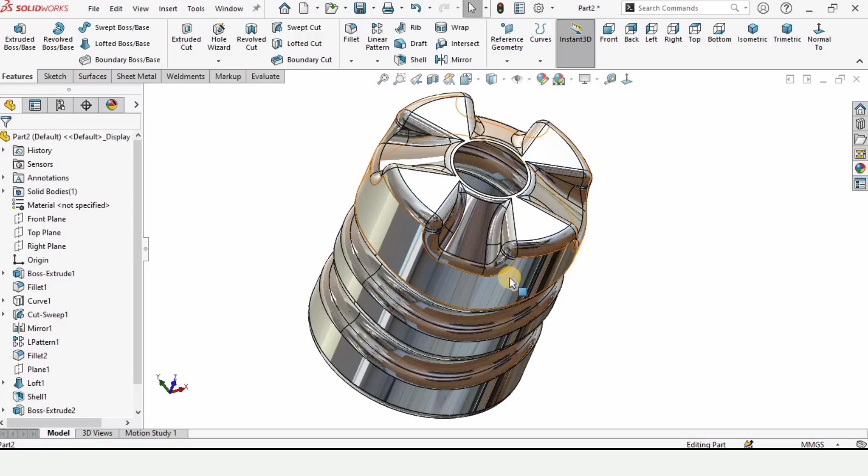In this tutorial we will be designing this water tank in SolidWorks. So let's begin. Click on part and then click OK as we are working in the part file. From here you can change the background to plain white. Then click on front plane and click on sketch.

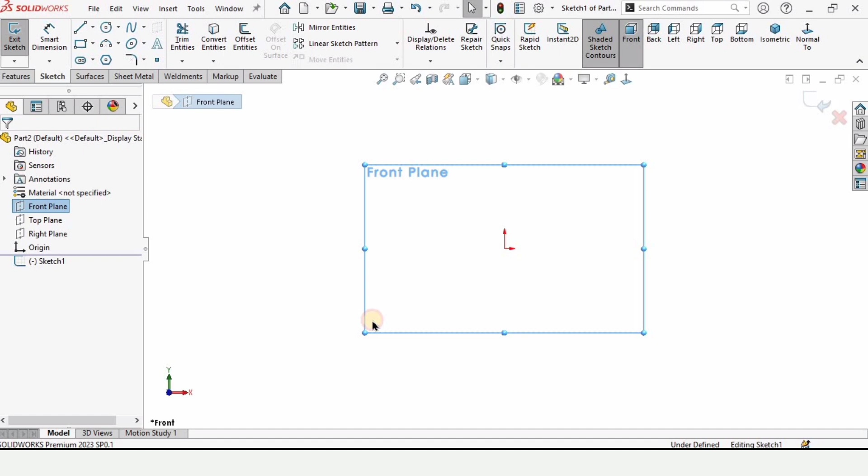Before proceeding, make sure that you are working in correct units. I am working in millimeters, that is MMGS. Now select this circle and make a circle at this origin. Now let's specify the diameter for this circle, which is 375 millimeters. Then go to features, select extruded boss base, and here specify the length of extrusion, which is 375 as well.

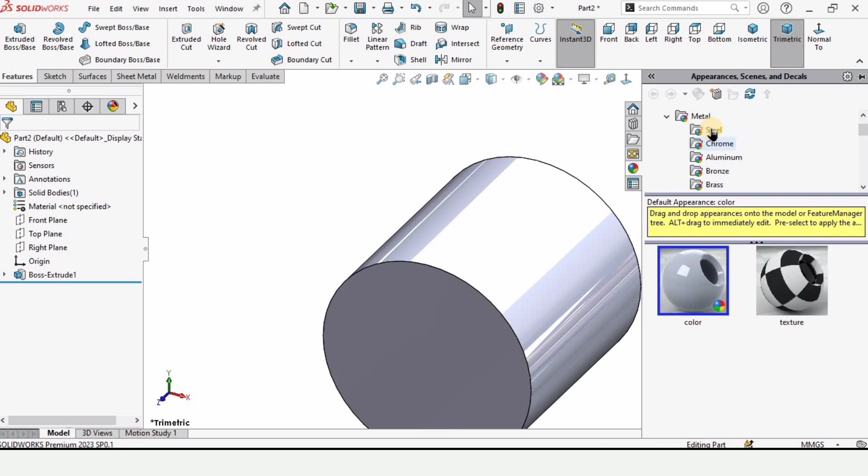Now click OK. Before proceeding any further, let's apply some appearance for better visualization. By the way, this is an optional step. After specifying some appearance, now let's select fillet and apply fillet on this edge, and here specify the radius as 20 millimeter and click OK.

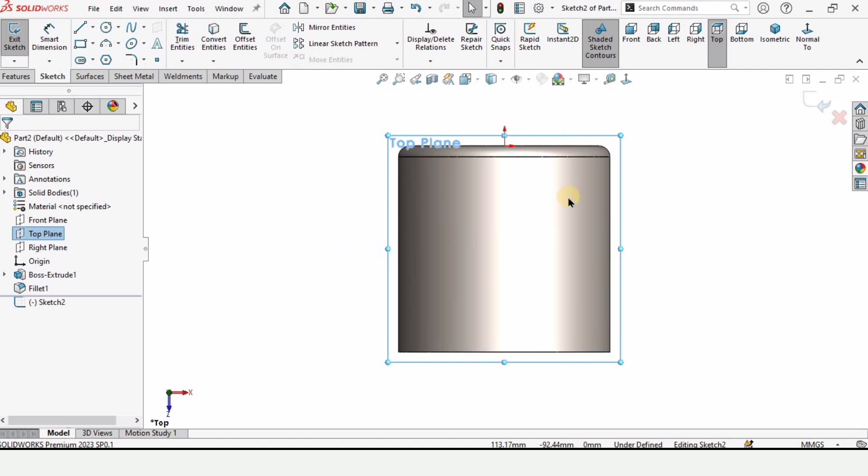And now select this top plane, which basically cuts this part in half, and here select sketch. Now from here select spline tool and here make a spline like this. This is an approximated sketch. You can specify the dimensions, but I'm not going to. You can very carefully see it and make it like this.

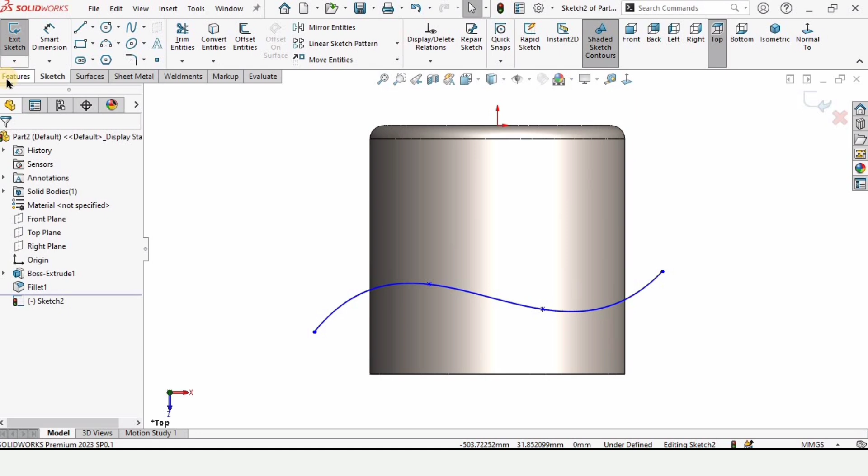Now go to features and here first exit the sketch, go to curves and select projected curve. In this window we need to select this sketch, which is basically the spline, and then select this face or surface and click OK. The projected curve on the surface will appear.

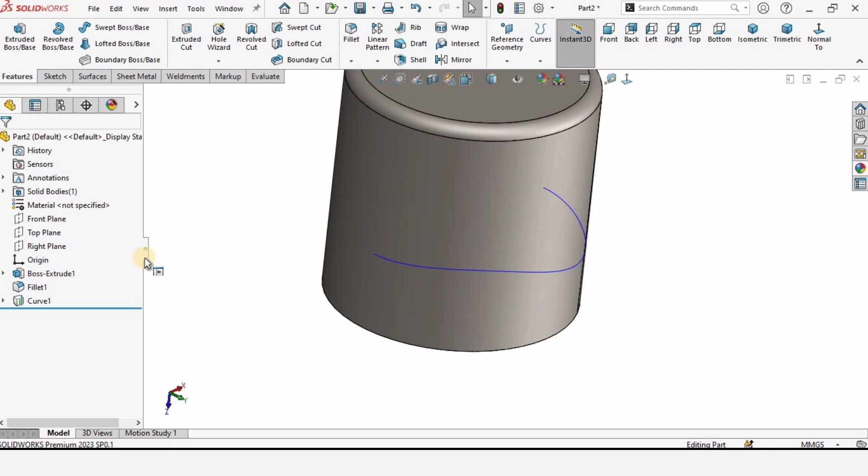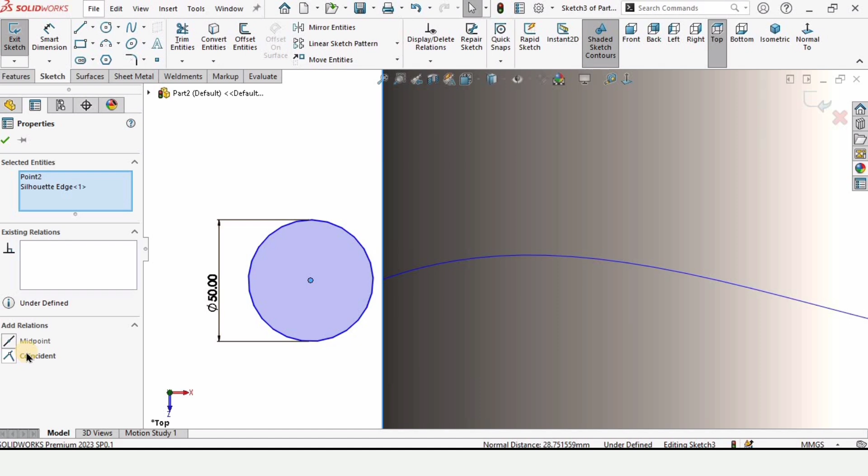Now select the top plane again and click on sketch and make a circle like this, and specify its diameter, which is 50 millimeter. Now press escape, hold the control key on your keyboard and select this line and the center of the circle and make relation coincident.

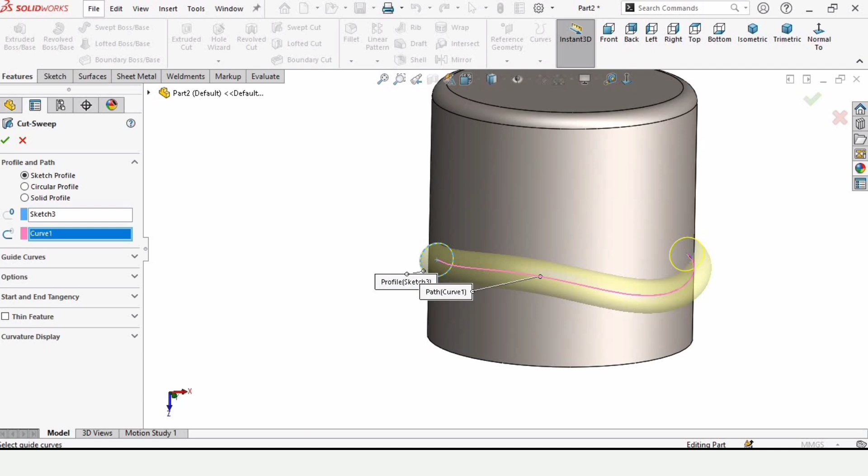Now exit the sketch and go to features and select swept cut command, this one. In this window we need to select this circle, and in the next window we need to select this spline, and it will cut like this. You can check the box from here, and we need to mirror this thing. Before that, let me hide this spline.

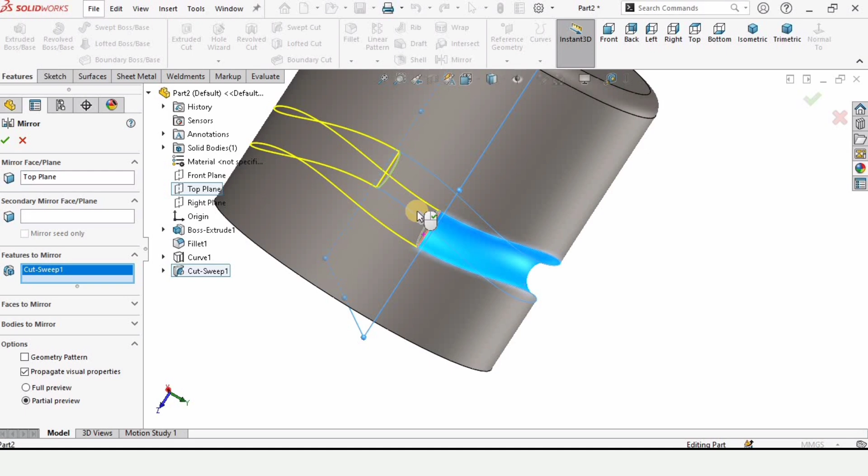Now select mirror. In this window we need to select the top plane, which basically cuts this part in half, and in the features to mirror window we need to select this cut that we have just created, and as you can see this yellow cut will appear. So that's how we can mirror the same cut.

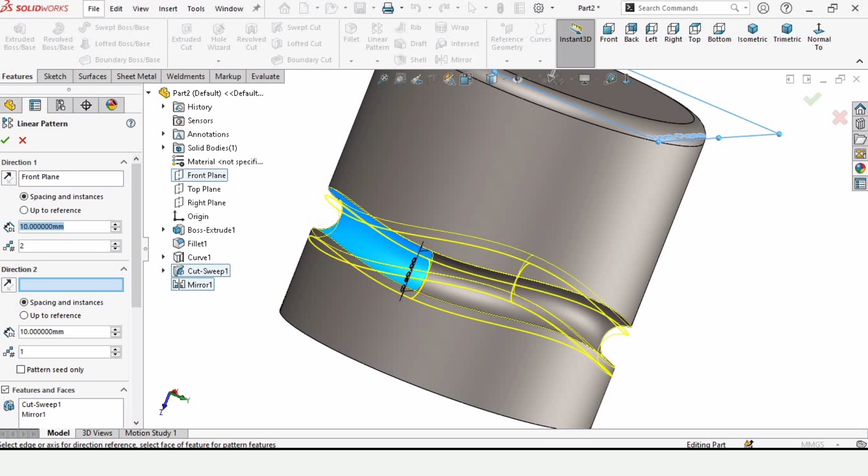As we want this same cut on the upper side, I am selecting linear pattern. In features and faces I am selecting these two cuts, and in direction just specify the front plane. Now we need to specify the distance, so I'm specifying 120 millimeter. This can be adjusted. Since I want it upward, I'm selecting the upward direction and check this box. This cut is now linear patterned, and now we have two cuts.

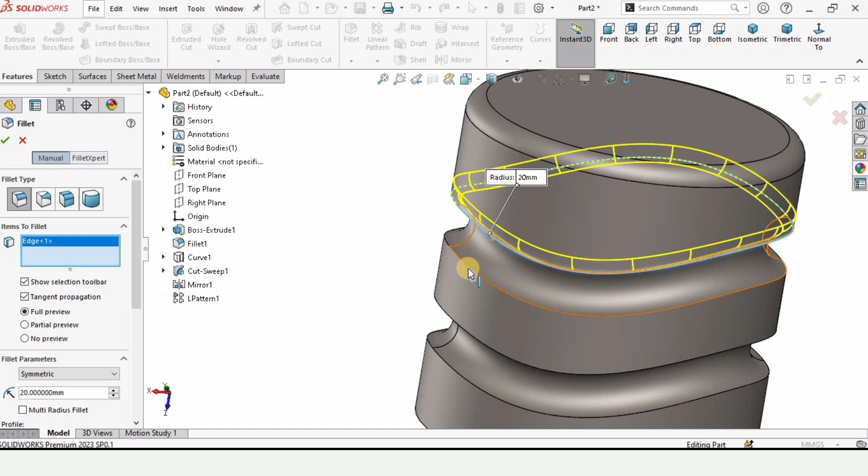Before moving any further, let's create some fillets. These are basically 4 edges, and apply a 20 mm fillet. Second edge, this one is third, and the last one. 20 mm fillet is fine for these, and after that check this box. Fillet has been applied, as you can see.

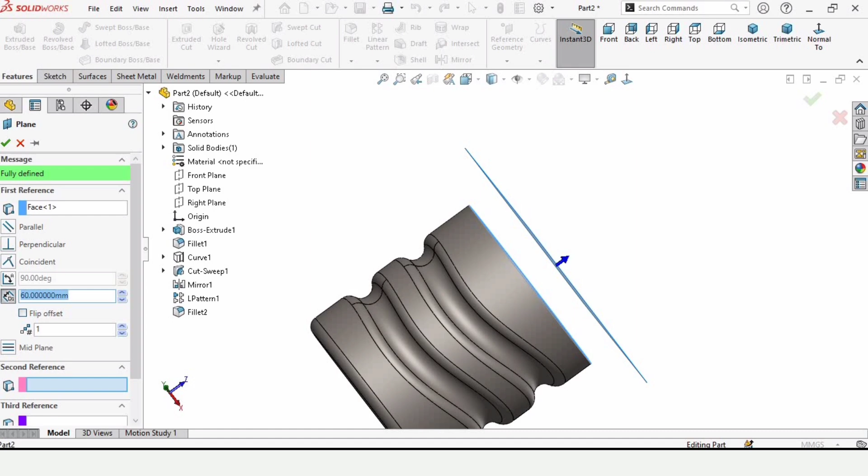Now select this face and in reference geometry click on plane. We need to create a plane which is 60 millimeter offset from this top surface, and check this box. Now select this plane and click on sketch. Here we will create a circle, so select circle and create a circle at this origin like this.

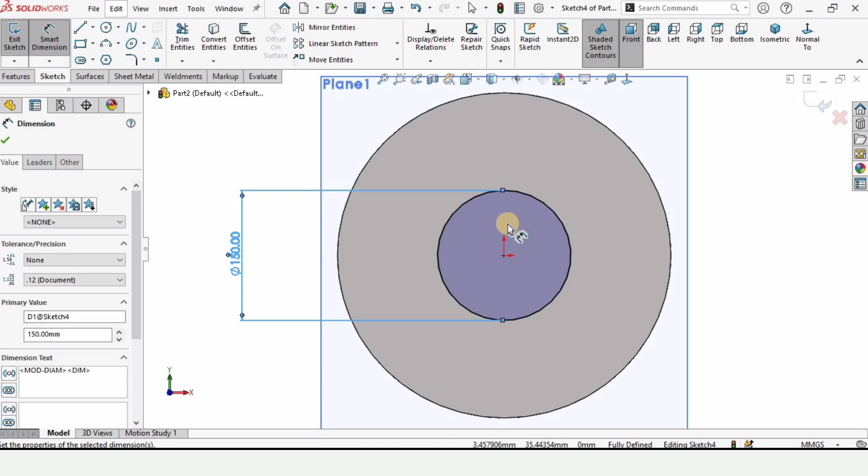Now here specify the diameter for this circle, which is 150 millimeter. Simply exit the sketch from here and go to features, and here select lofted boss base. In this profile window we need to select this edge, circular edge, this is appeared here, and this circle that we have just created. So basically we wanted to create this profile by using the lofted boss base.

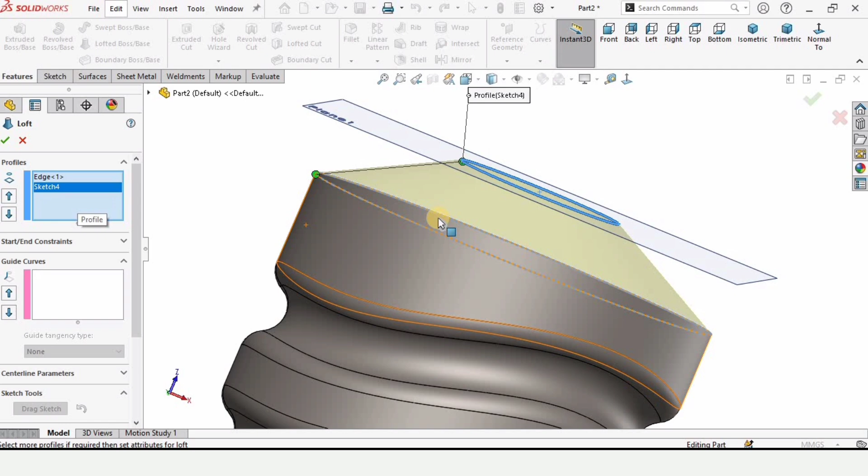As we have nothing to do with this plane anymore, hide it from here. Now we will shell it, so select shell and here select this face and here specify 5 millimeter. 5 millimeter will be the thickness for this water tank, and here you can see now it has become hollow.

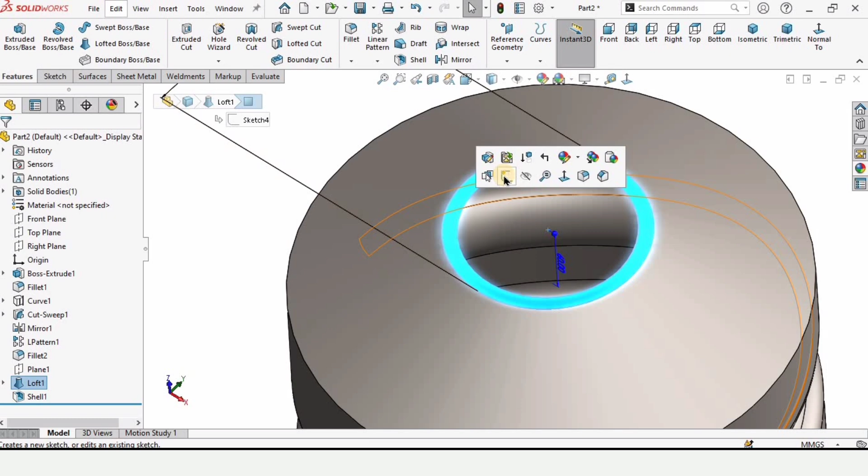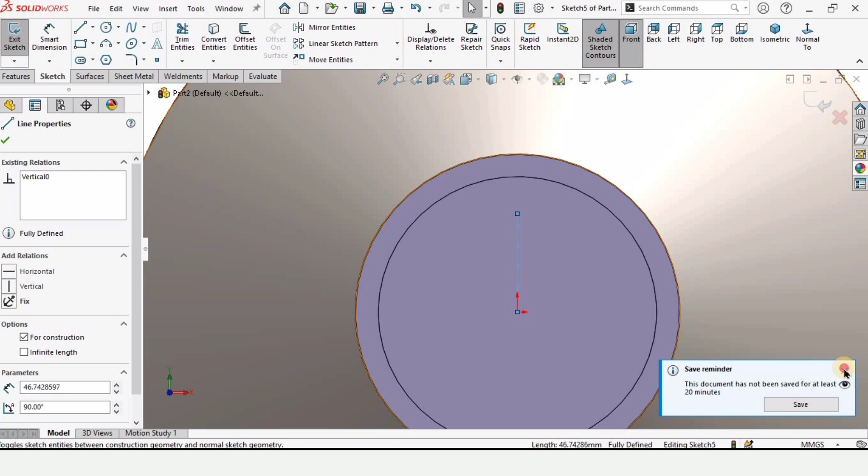Now select this top face and click on sketch. We will create a sketch here. We want to select this outer circle and convert entities. A circle will get created. Now here I want to make a reference line. It should be straight, but let's create inclined. Now click on this line and make relation vertical, and here you can see a vertical line is created.

Now select a line and from this circle to the other make a line. Okay, there is an error, so select line again, and from any point in space to this upper circle make an inclined line. Now hold Control key from your keyboard, select the circle and edge of the line and make relation coincident. And now let's specify the angle between these two lines as 150 degree.

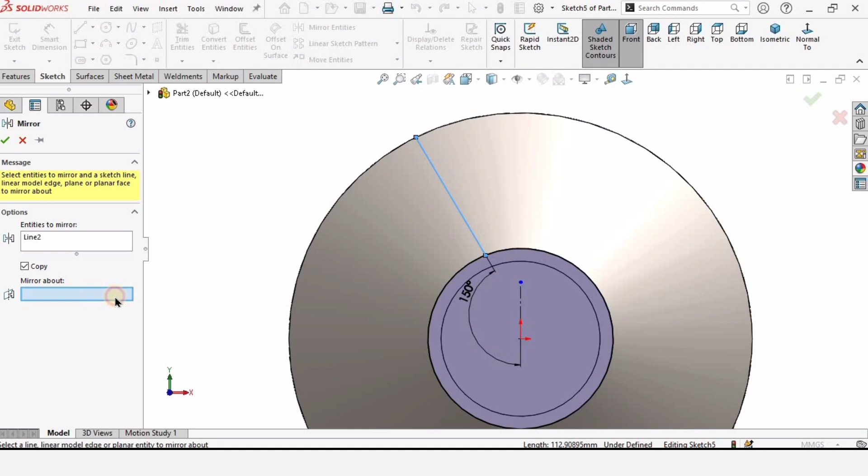As we want the same line on the other side, select mirror entities. In this window select this line, and in the mirror about window select this reference line, and as you can see this is mirrored. So this is basically the purpose of making that reference line. Now select this outer circle and click convert entities. Now select trim and select these two circles. Basically I want this arc and this arc and these two inclined lines.

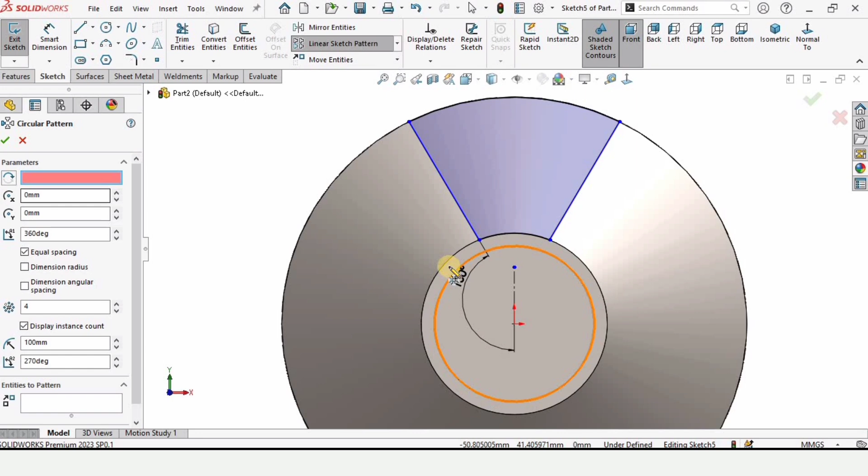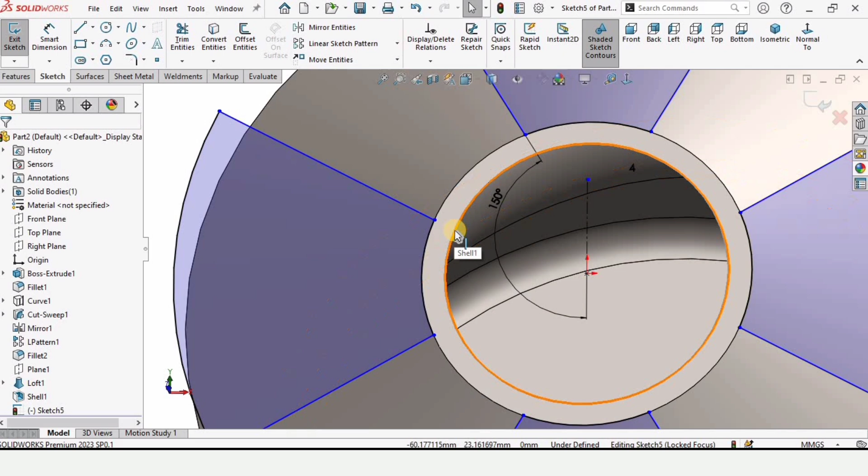Now I want 4 sets of these, so I am selecting here circular pattern. In this parameter window simply select this midpoint, or you can select this circle as well. The midpoint will automatically get selected, and here select 4 because we want 4 of these entities, so select all of these 4 entities, 3, 4, and it will get patterned. Check this box from here, and here you can see 4 sketches will appear. Now select this internal circle and convert entities.

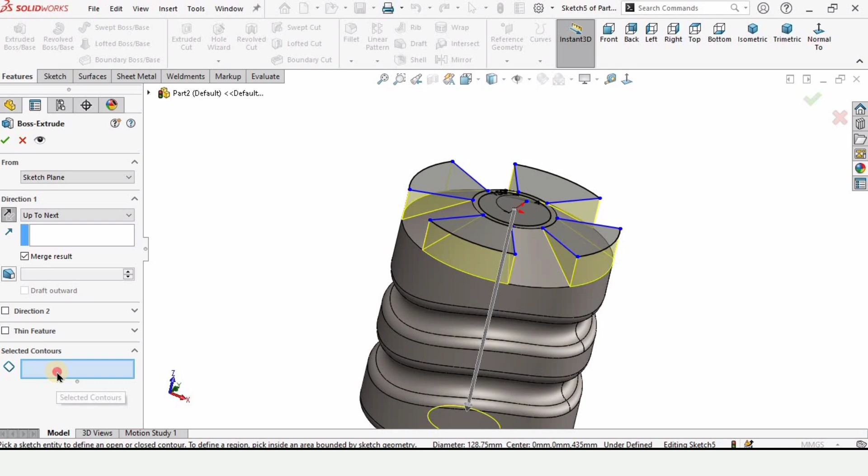Okay, now this is ready for extruded boss, so select here extruded boss. We want downward direction, so select here downward direction, and after that here select up to next. Okay, and in this selected contours window select one by one these 4 sketches, 1, 2, 3 and 4, and simply check the box.

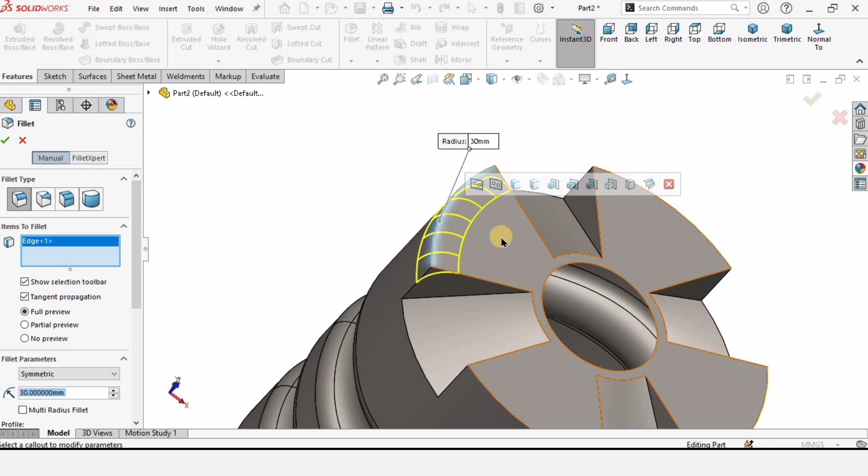And after that we need to make a few fillets, so select your fillet tool and here specify 30, and now we need to select all of these corners. Rather than selecting all of these corners, just select this first option and all of these corners will automatically get selected. Since the radius of the fillet is too large, here specify 20 mm as radius and check this box from here.

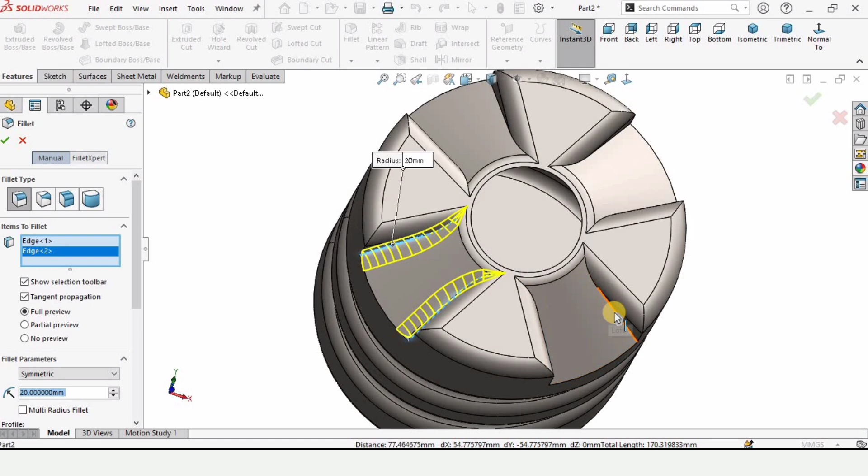Now we need to create fillets on internal edges, so select the fillet tool again and select these internal edges. Rather than selecting all of these edges, we will do the same thing. We will select this very first option and automatically all of these internal edges will get selected, and then check this box from here. 20 mm fillet has been applied, and now you can change the appearance, so I am selecting this one. So that's how we create a water tank in SolidWorks.